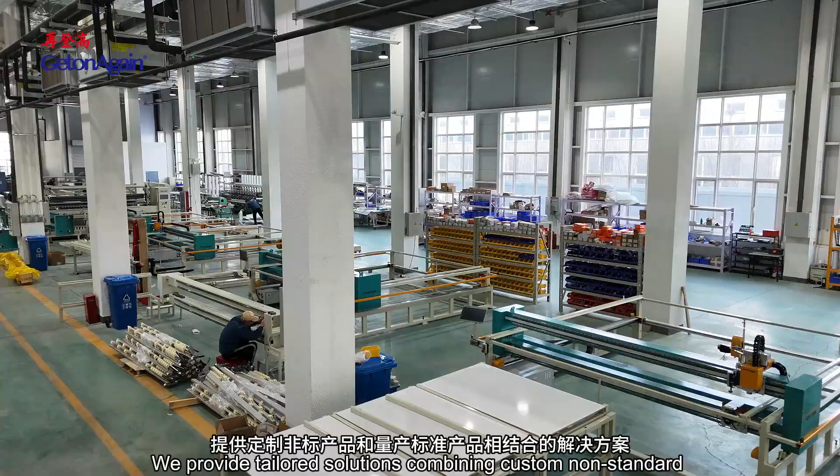We provide tailored solutions combining custom non-standard products with mass-produced standard products, including mechatronic machines, automated production lines, and intelligent factory solutions. Pattern room equipment includes the magic inkjet plotter, 2 cartridge with maximum printing speed at 110 square meters per hour.

4 cartridge with maximum printing speed at 200 square meters per hour. Vertical inkjet cutting plotter, 1 machine with multiple functions, pattern drawing with cutting, or standalone drawing. High-quality rotary cutting knife can cut minimum 80 grams per square meter paper for sample design, saving cost.

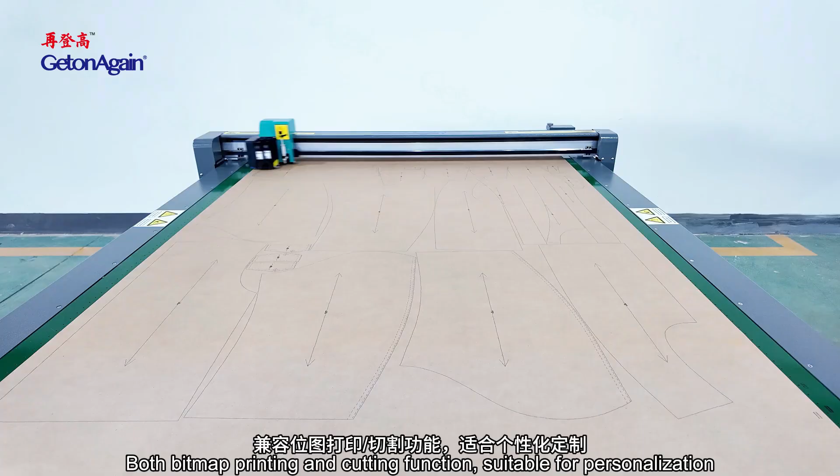Flatbed inkjet cutting plotter, both bitmap printing and cutting function, suitable for personalization, configured with long knife or short knife, and optional fixed knife sleeve or elastic knife sleeve, suitable for cutting various materials.

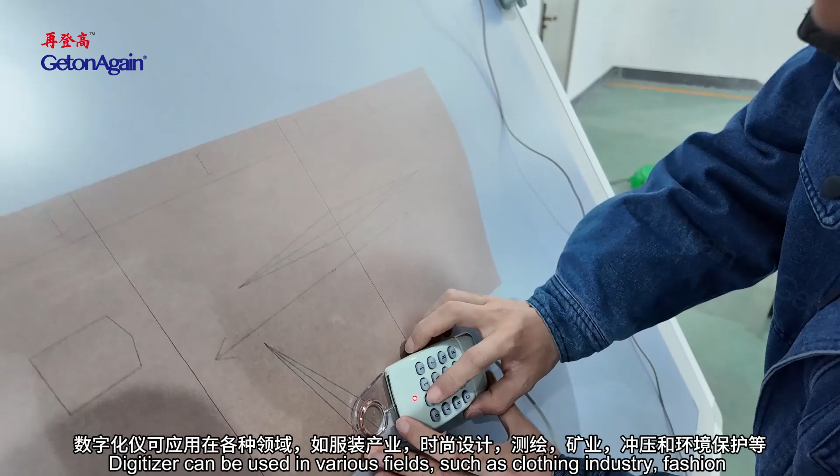Digitizer: easily reading paper patterns, convenient positioning, simple operation, accurately reading patterns, enabling faster design. It is a powerful tool for traditional manual drawing digitization. Digitizer can be used in various fields such as clothing industry, fashion design, surveying and mapping, mining, stamping, and environmental protection, etc.

Flatbed scanning digitizer: one button to start after placing scanning pieces. Can perform vacuum absorption, auto scanning, auto transmission. According to different models, supports ultra long width scanning.

Scanning speed up to 7,200 mm per minute. Scanning resolution 150 to 300 dpi. High definition panoramic 1:1 image to ensure effective identification of various contours, notches, and inner holes.

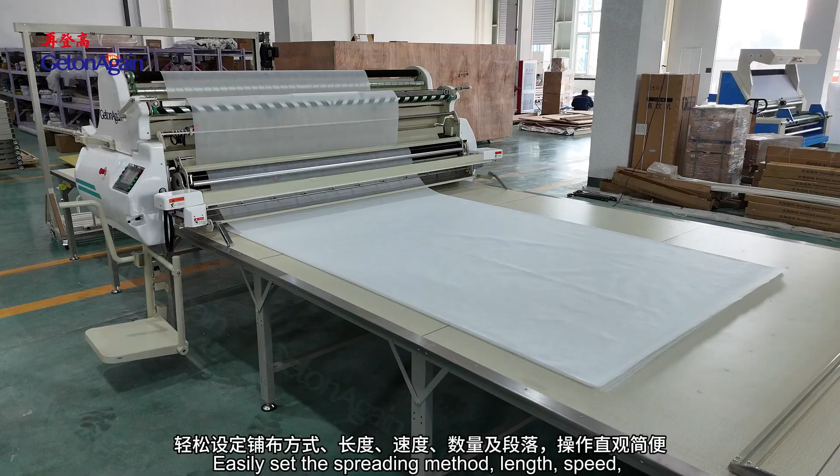Cutting equipment includes the automatic spreading machine. Easily set the spreading method, length, speed, quantity and sections, with intuitive and simple operation. Dual use for both knit and woven fabrics, suitable for t-shirts, children's clothing, loungewear, and toy textiles.

Automatic single layer cutting machine: no need to create specialized cutting molds. Cutting can be performed precisely by directly importing CAD design drawings into the equipment. It optimizes cutting paths, integrates repeated cutting lines, allows for pre-simulation of the cutting process, and supports continuous cutting for extra long materials.

Stripe and plaid matching cutting machine, equipped with several HD industrial cameras, performs intelligent combination according to the captured size, ensuring high accuracy fabric image capturing.

Stripe and plaid matching auto cutter, equipped with double knives and pen draw punching working mode, special for various stripes and plaids fabric cutting in single ply.

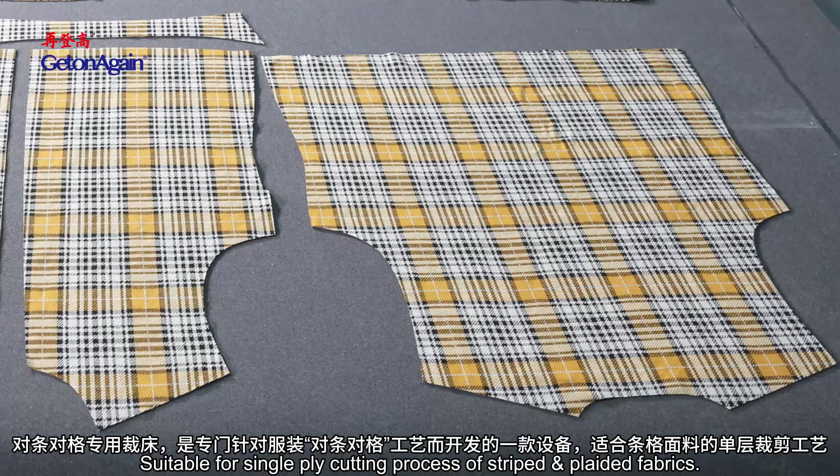High-end clothing customization: the effect of the alignment match stripe and plaid process has become an important measurement of the quality of this type of clothing. The stripe and plaid auto cutter is equipment specially developed for this process to meet matching stripe and plaid clothing needs, suitable for single ply cutting. Process of striped plaided fabrics.

Automatic multi-layer cutting machine: through the combination of micron-level intelligent sensing components and an intelligent control system, dynamic compensation and correction of cutter deformation during cutting operations are achieved, significantly reducing errors between the top and bottom layers of fabric during cutting, enabling truly high-precision intelligent cutting.

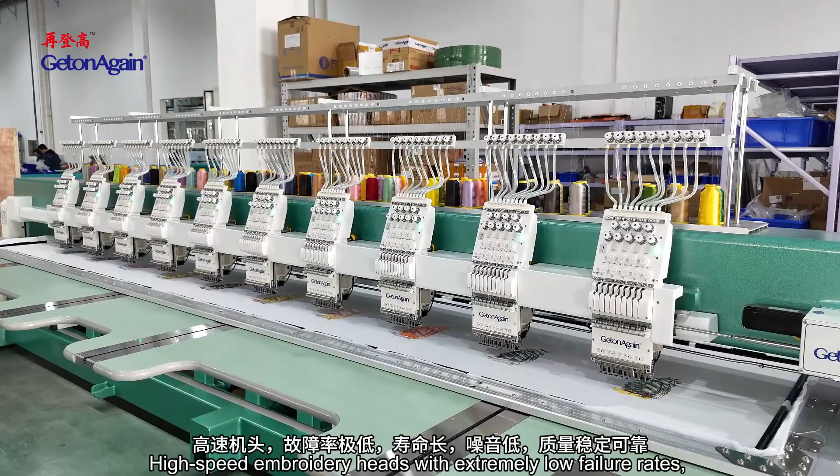Computerized embroidery machine: high-speed embroidery with extremely low failure rates, long service life, low noise, and stable, reliable quality. Equipped with an upper thread clamping device to prevent thread detachment and breakage, ensuring excellent embroidery results. Suitable for textile and garment manufacturing, footwear, hats, bags, home decoration, automotive interiors, and industrial products area.

Embroidery equipment includes the Cloud Smart Teaching Embroidery Machine, suitable for integrated theoretical and practical teaching of computer embroidery in fields such as fashion and apparel design, clothing design and its engineering.

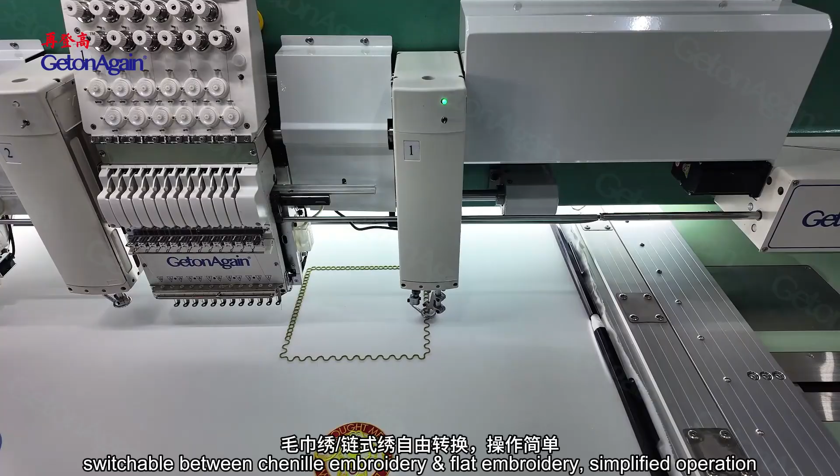Mixed chenille chain stitch embroidery machine. Mixed embroidery feature: according to color sequence settings, switchable between chenille embroidery and flat embroidery, simplifying operation. Chenille needle height can be adjusted to 10 levels according to chenille pile height or chain stitch thread thickness.

Multifunctional embroidery on garment, shoes, caps, home textile, toys, bags and luggage, arts and crafts, etc.

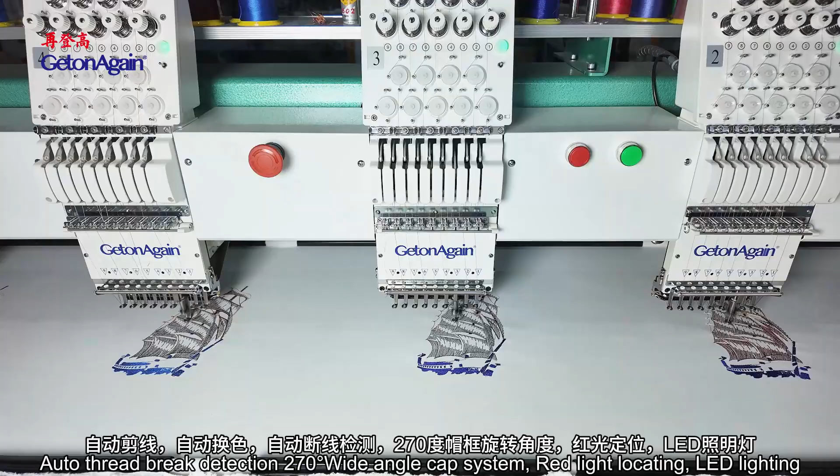Multi-head tubular embroidery machine multi-head series, suitable for embroidering on flat items, caps, garments, shoes, belts, bags, etc. Auto thread trimmers, auto color change, auto thread break detection, 270 degree wide angle cap system, red light locating, LED lighting, precise head and drive system to ensure exquisite embroidery work.

Drop tables, easy to lift up and down. Multiple heads greatly improve work efficiency, suitable for embroidery shops and factories of a certain scale.

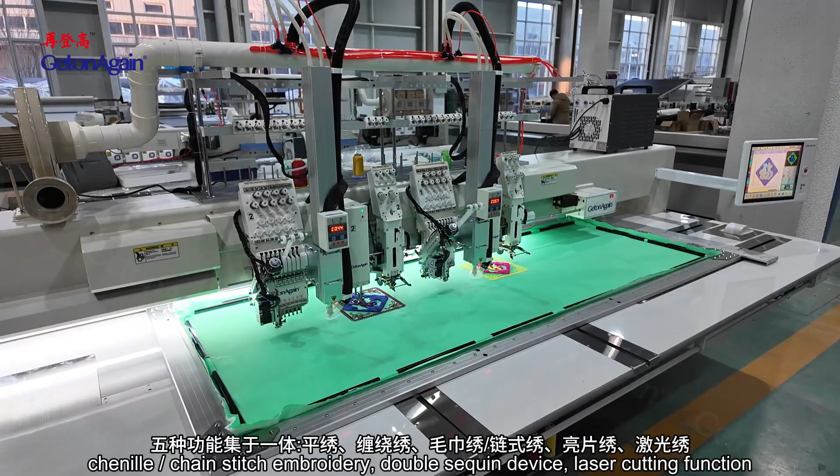Computerized 5-in-1 embroidery machine, integrating 5 functions in one machine: flat embroidery, coiling, tape cording embroidery, chenille and chain stitch embroidery, double sequin device, and laser cutting function. High precision, strong stereo sense, ideal artistic effect, suitable for embroidery of apparel, home textile, furniture, teaching, design and arts and crafts, etc.

Tufting series equipment includes computerized tufting machines with a rotary tufting head that works at any angle, avoiding positive-negative stitching differences, for higher efficiency and better tufting results. Suitable for various rugs, carpets, hanging carpets, tapestry, and other flooring, decorative, and home furnishing products.

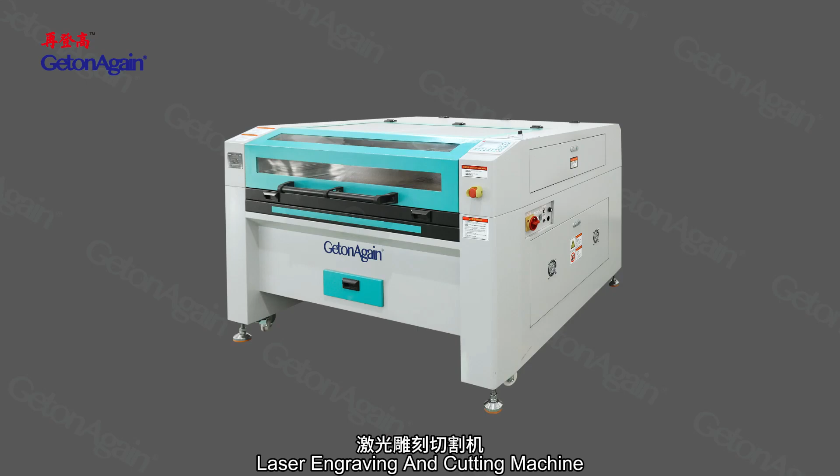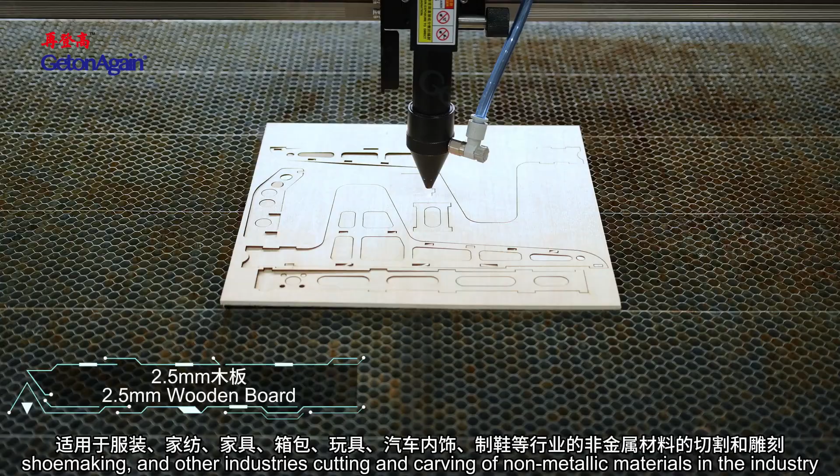Laser engraving and cutting machine. The cutting center can directly and seamlessly interface with software such as AutoCAD, CorelDRAW, AI, and Garment CAD, ensuring easy operation, high cutting precision, and fast cutting speed. Suitable for clothing, home textiles, furniture, luggage, toys, car interiors, shoemaking, and other industries for cutting and carving non-metallic materials.

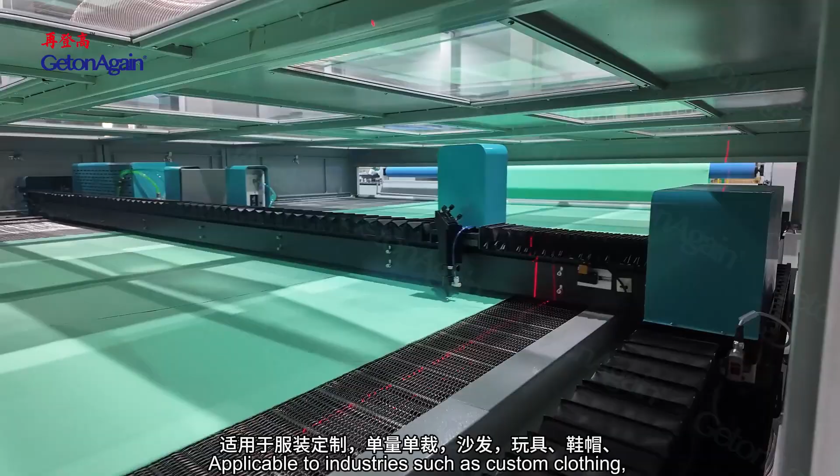Fully automatic large format laser cutting machine with inkjet device. Large format automatic feeding system designed to meet requirements for feeding and cutting whole rolls of fabric. Inkjet and cutting functions integrated for enhanced versatility. Applicable to industries such as custom clothing, single-piece cutting, sofas, toys, footwear and headwear, textile print pattern positioning cutting, automotive interiors, industrial filtration, and advertising, etc.

Sewing equipment includes an automatic arbitrary rotary single needle leather sewing machine, suitable for automated leather pattern sewing in automotive interiors, car seat covers, car door panels, airplane seats, and leather furniture upholstery. Brand new integrated sewing head design with a simple and elegant overall appearance, and a 15-inch HD industrial touch control screen.

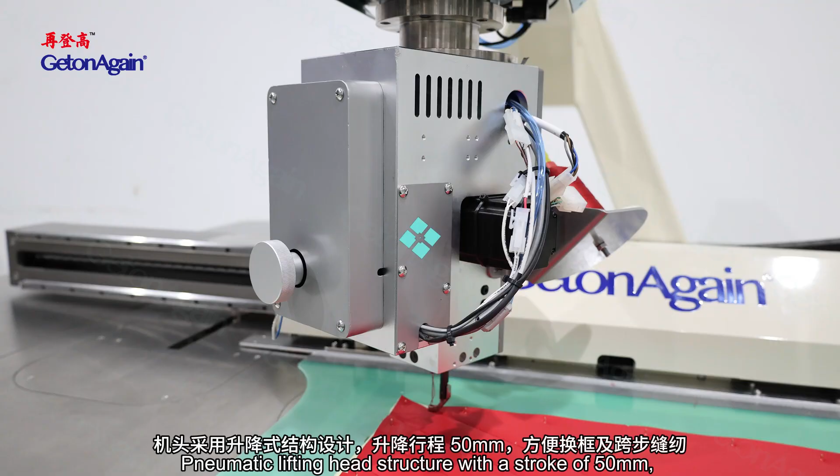Two-size workbenches designed with a flexible mechanism, reducing size after folding for easier transportation. Sewing head can rotate at any angle, avoiding differences between forward and reverse stitches, improving sewing efficiency and stitch quality. Pneumatic lifting head structure with a stroke of 50 mm, making frame changes and span sewing more convenient.

The advantage of an independently driven presser foot system lies in its ability to control presser foot height through real-time pattern programming, effectively addressing uneven presser foot pressure issues when sewing materials of varying thicknesses. Newly upgraded triple lead screw drive for higher dynamic positioning accuracy. Max speed of machine head at 2,500 stitches per minute.

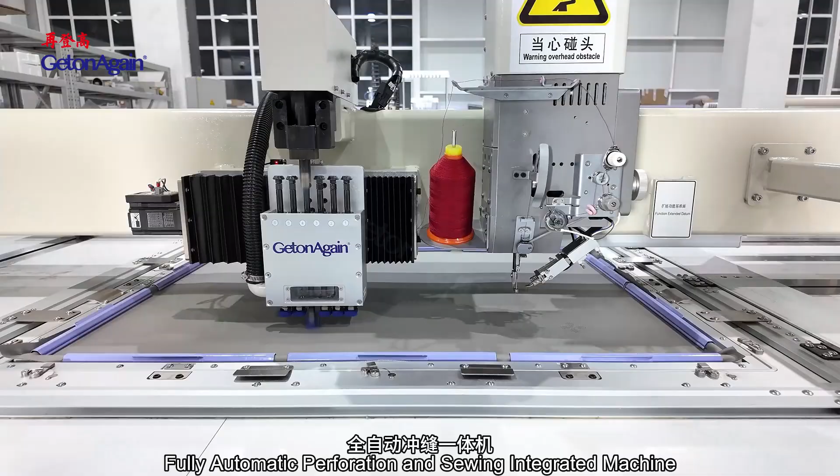Fully automatic perforation and sewing integrated machine. The punching machine head is specifically designed and developed for leather materials, equipped with various round punching tool specifications. Sewing head has an up moving stroke of 50 mm, providing sufficient space for material loading and easy operation. Suitable for perforation and sewing processes of various types and thicknesses of genuine leather and microfiber leather used in car seats, automotive interiors, aircraft seats, luggage, furniture, and more.

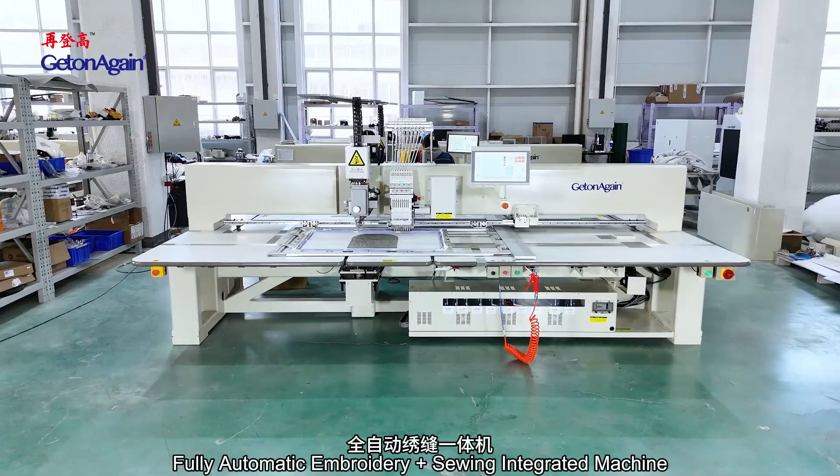Fully automatic embroidery and sewing integrated machine. 9-color embroidery machine head to meet the embroidery needs of different industries. The embroidery thread clamping mechanism incorporates a novel upper thread clamping assembly, effectively reducing thread breakage and slippage during operation. Specially designed sewing machine head for leather materials, producing beautiful stitching.

Presser foot height is motor controlled and highly adjustable. Sewing machine head has an up-down moving stroke of 50 mm, providing ample space for material loading and ease of operation. Suitable for various types and thicknesses of genuine leather and microfiber leather for automotive seats, car interiors, aviation seats, luggage, furniture, etc., combining embroidery and sewing processes.

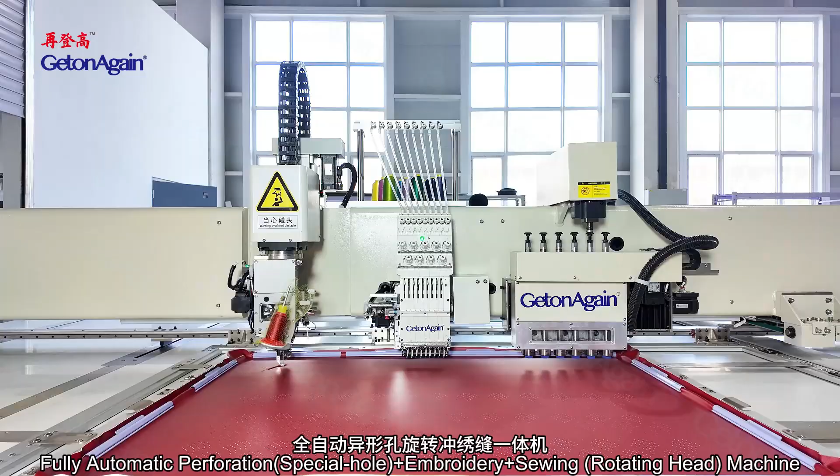Fully automatic perforation special hole and embroidery and sewing rotating head machine. Integrates punching, embroidery, and sewing into one machine, allowing for arbitrary pattern design and seamless combination of punching, embroidery, and sewing for complex processes. Specially developed punching machine head for leather materials. The 9-color embroidery head meets the embroidery needs of various industries.

Sewing machine head features an arbitrary rotation structure, creating beautiful stitching, reducing frame movement frequency, and improving efficiency. Suitable for punching, embroidering, and sewing processes for various types and thicknesses of genuine leather and microfiber leather used in automotive seats, car interiors, aviation seats, luggage, and furniture, etc.

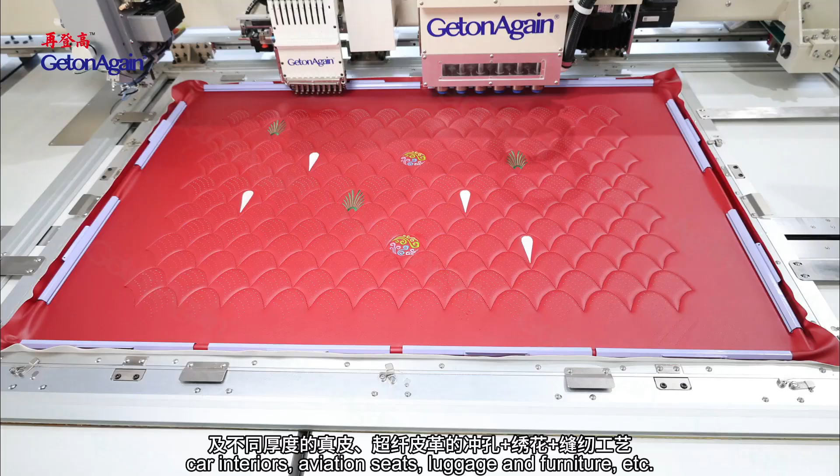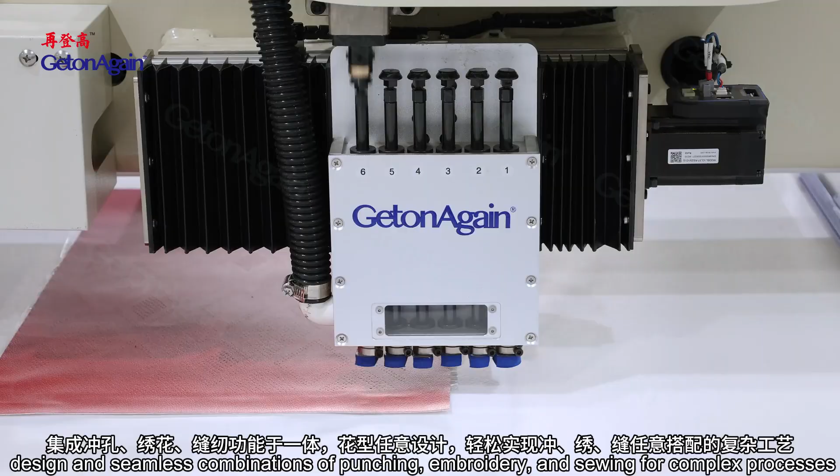Fully automatic perforation round hole and embroidery and sewing rotating head machine. Integrates punching, embroidery, and sewing into one machine, allowing for arbitrary pattern design and seamless combination of punching, embroidery, and sewing for complex processes. The 9-color embroidery head meets the embroidery needs of various industries.

Sewing machine head features an arbitrary rotation structure, creating beautiful stitching, reducing frame movement frequency, and improving efficiency. Suitable for punching, embroidering, and sewing processes for various types and thicknesses of genuine leather and microfiber leather used in automotive seats, car interiors, aviation seats, luggage, and furniture, etc.

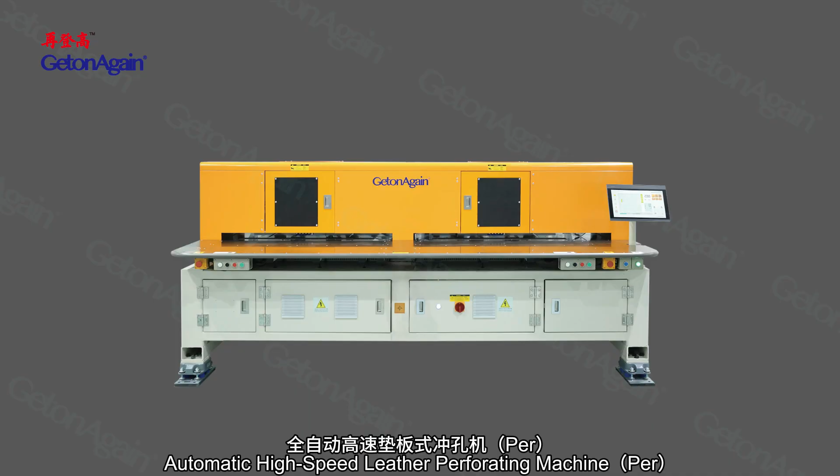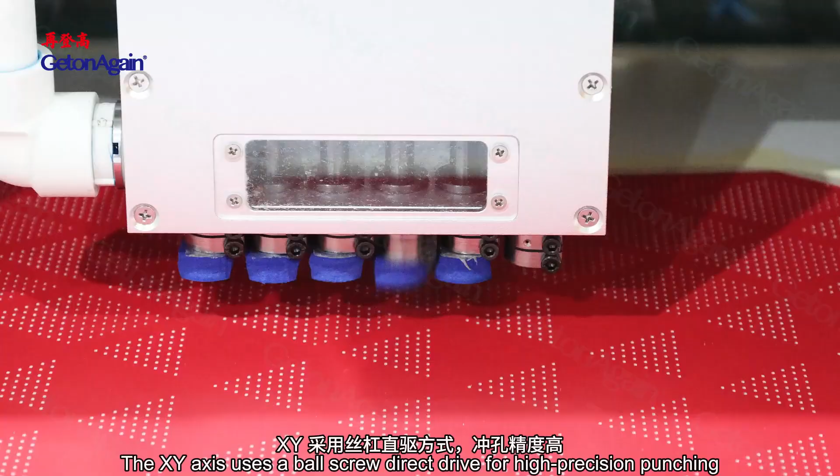Automatic high-speed leather perforating machine for punching processing of leather or microfiber leather with various types and different thickness, such as car seats, aviation seats, shoes, bags and furniture. Full-scale 3-dimensional protective design ensures safer operation. The punch toolbox is heightened to prolong the punch tool's spring service life and reduce part wear. The XY axis uses a ball screw direct drive for high-precision punching. The surface of key punching parts is strengthened to resist impact and fatigue, meeting the needs of high-intensity work. Single-head machines can make up to 2000 holes per minute, and double-head ones up to 4000.

Automatic template sewing machine, rotary head, heavy material. Both the X and Y axis use a screw and slide transmission method, providing high precision and good stability. Suitable for pattern sewing on leather and heavy materials, such as car seats, sofas, massage chairs, boat interiors, and aircraft seats. The machine head can rotate freely to ensure the quality of the sewing stitches.

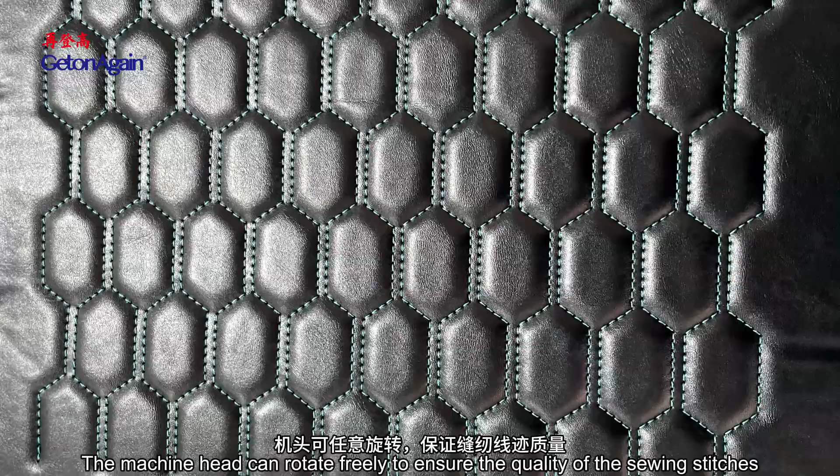Automatic template sewing machine. Double belt, double guide rail, double stepper motor structure. The machine head adopts oil-free lubrication, and the rotary shuttle adopts oil-line lubrication technology to completely eliminate fabric pollution. Identify patterns through RFID barcodes and automatically switch to the corresponding sewing program for quick sewing. Used for template sewing processes such as opening pockets, notches, bag covers, collar trimming, etc.

Pattern sewing machine. This machine can easily sew thick thread with a thickness of 1.2mm, has a 2 times large rotary hook with automatic thread trimming, and the maximum sewing speed can reach 2500 RPM.

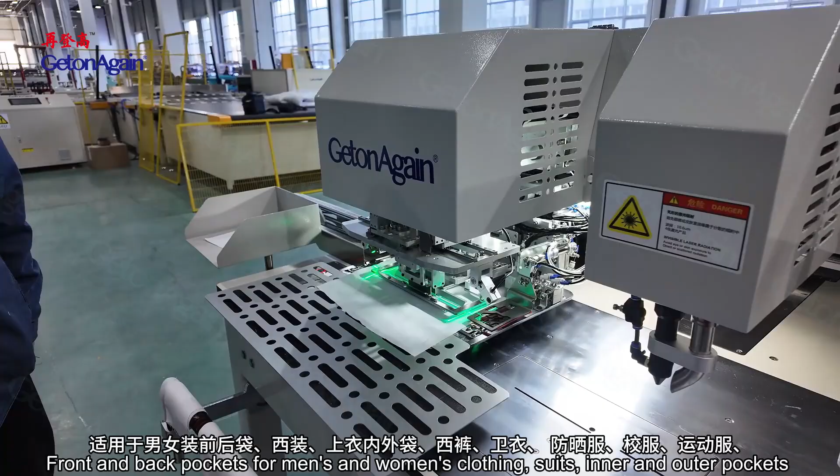Automatic laser pocket opening machine. Automatic ironing-free pocket folding, automatic material feeding, laser pocket opening, automatic sewing, automatic thread trimming, and automatic material collection. Used for front and back pockets for men's and women's clothing, suits, inner and outer pockets of jackets, dress pants, hoodies, sun protection clothing, school uniforms, sportswear, cotton padded jackets, down jackets, workwear, jackets, uniforms, trench coats, cashmere coats, and plackets for polo shirts.

Quilt edge binding machine. Features single needle compound feed, achieving cutting, binding, and sewing in one seamless operation. Enlarged right side waste discharge port with pneumatic waste discharge assistance ensures smoother disposal of waste generated during edge cutting. Special synchronized feeding structure, including alternating presser foot, needle, feed dog, and binding attachment. Ensures no wrinkles or misalignment during straight line or corner sewing for a flawless binding effect.

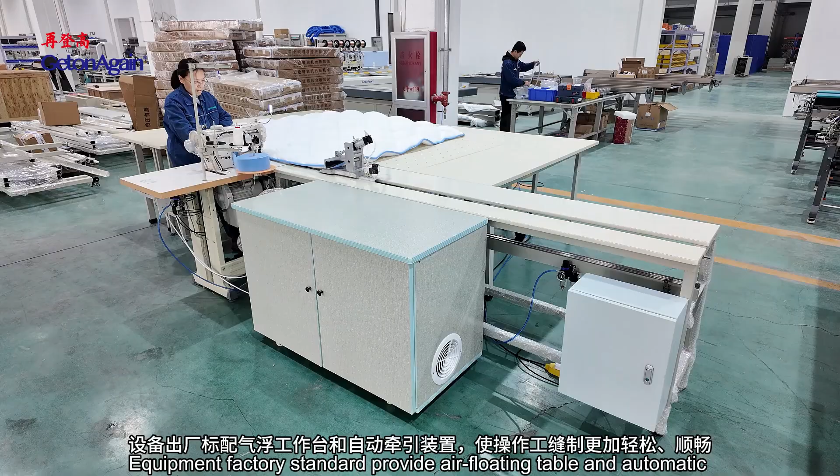Designed for edge binding processes of quilts such as cotton quilts, summer quilts, spring and autumn quilts, and other bedding items. Quilts, mattress binding with pulling sewing workstation. Equipment factory standard provides air floating table and automatic pulling device, making sewing worker operation easier and smoother. Equipped with PLC control pulling device synchronized with sewing machine electronic control, these two machines work at the same speed and synchronized direction.

Optional automatic storage and vacuuming device improves efficiency, reduces dust emissions, and provides the sewing operator a clean and tidy working environment. Binding result is rich with a strong, solid feel. Corners are smooth and nice, evenly stitched length, no hairy edge, no edge folding, neither corner raising effect, nor other negative symptoms.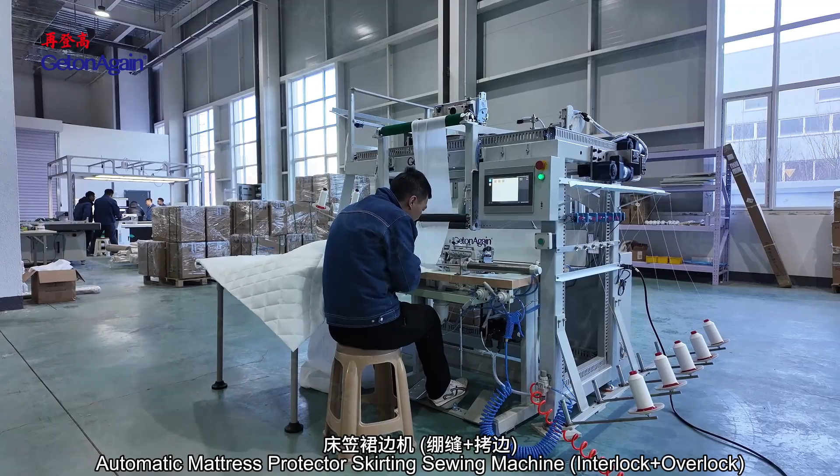Automatic mattress protector skirting sewing machine, interlock and overlock. Suitable for processing fitted sheets, all-in-one to finish binding stitching of elastic rope cord and bag skirt, and the overlocking of bag skirt to mattress protector topper layer.

Multi-hole bar tacking machine, press arm and sewing frame work synchronously, ensuring high precision bar tacking. Suitable for chair pad, cushion and pillow, all those with fillings, and bar tacking requirement for reinforcing sewing work.

Long arm label sewing machine adopts connecting rod thread pickup, large rotary hook, needle bar swinging up and down, feeding simultaneously, forming zigzag lock stitch. Reasonable swing mechanism makes switching between zigzag sewing and normal lock stitch easy and free. Upper and lower synchronous feeding structure makes it easy to operate, with good sewing effect and beautiful stitches.

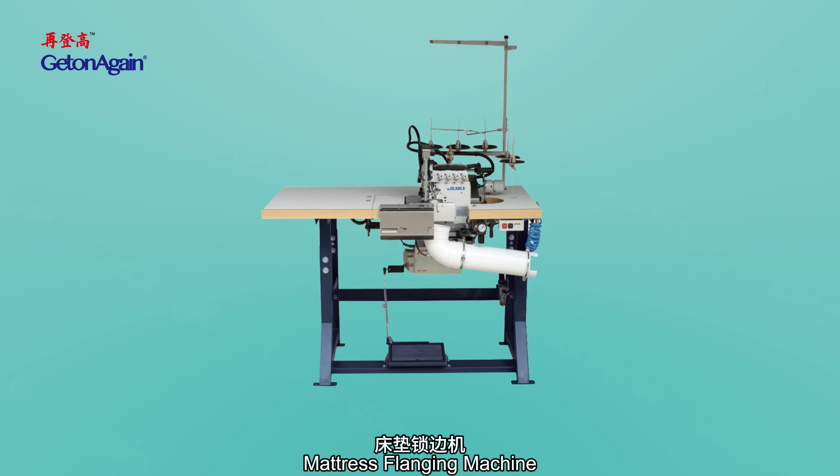Mattress flanging machine, equipped with a Juki machine head from Japan and a double bar twin needle design. Easily switches between thick and thin fabrics sewing. Flanging thickness 10mm to 70mm. Max speed 3000 revolutions per minute. Flanging width 25mm.

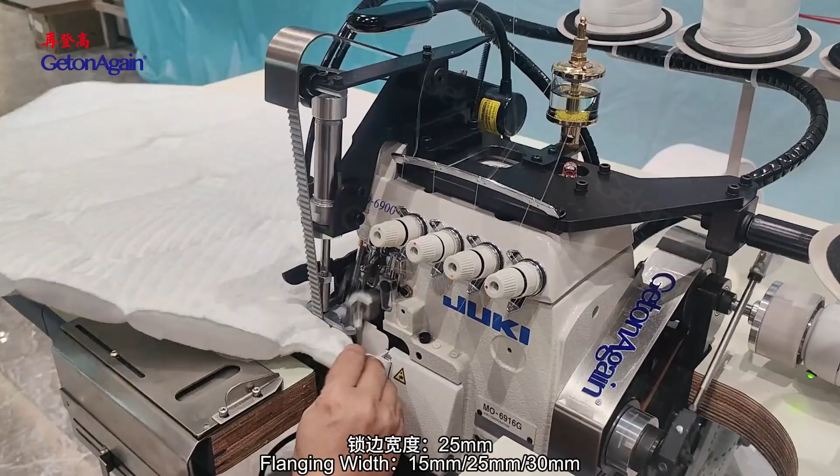High-speed mattress flanging machine. Effortless switching between thick and thin fabrics sewing. Synchronized feeding presser foot structure provides excellent feeding capability, enabling ultra-thick fabrics that standard machine heads cannot sew to pass through smoothly. Flanging thickness 10 to 90mm. Automatic lubrication and cooling system for the synchronized feeding structure. Max speed 4000 revolutions per minute. Flanging width 15mm, 25mm, 30mm.

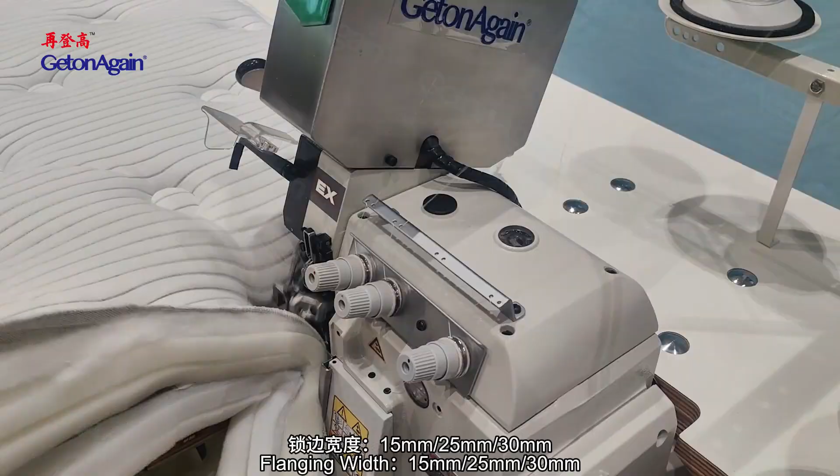Heavy-duty mattress flanging machine. Innovative drive mechanism ensures more convenient and powerful sewing performance. Adjustable stitch length of 4.5 to 6 stitches per inch. Easily switches between thick and thin fabric sewing, capable of overlocking extra thick mattress fabrics ranging from 10mm to 90mm. Maximum sewing speed reaches up to 4500 stitches per minute. Overlocking width is 25mm.

Computerized synchronized hot cutting binding machine, designed for products requiring binding processes, equipped with a standard pneumatic hot cutter. The binding tape no longer requires manual cutting; simply press a button to complete precise cutting. The hot cutting edges are clean, with no fraying or loose threads, significantly improving production efficiency.

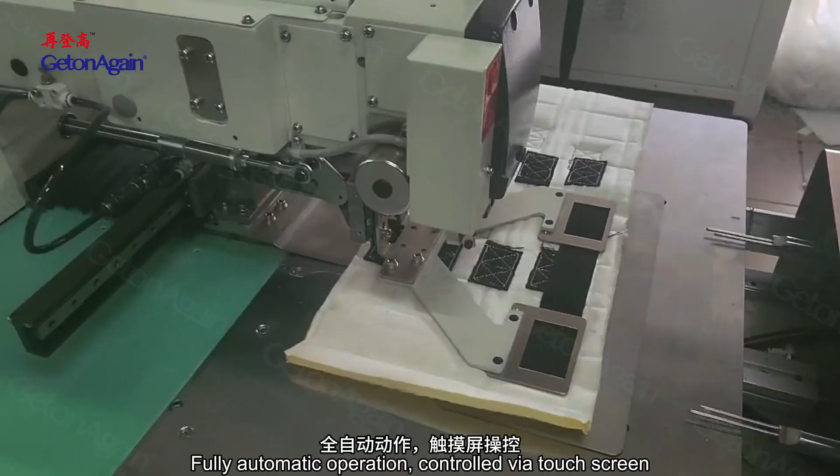Mattress handle stitching machine, fully automatic operation, controlled via touch screen. Customized stitching patterns are possible, significantly improving production efficiency. Easy to operate, precise positioning.

Semi-automatic mattress tape edge machine, primarily designed for sewing spring mattresses. This machine efficiently completes edge overlocking between mattress fabric and sidewall fabric. It is also suitable for sewing other types of mattresses and sofa cushions. Key features include an electrically adjustable work table with high strength, independent support, ensuring exceptional stability during operation.

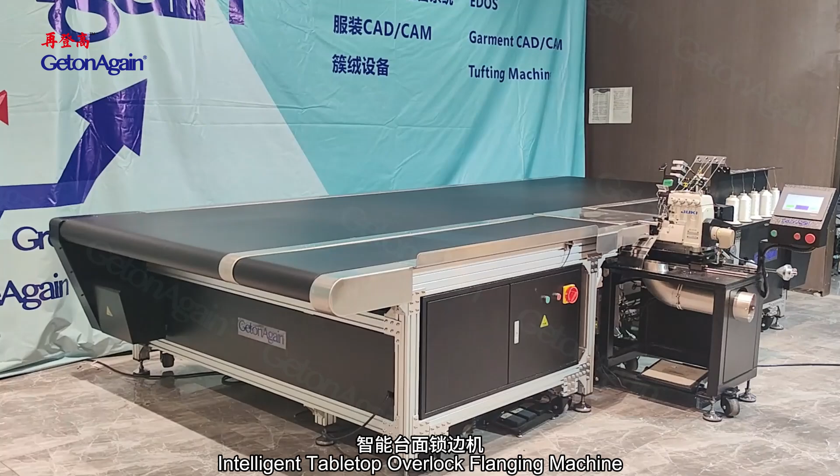Intelligent tabletop overlock flanging machine, equipped with a modified Juki thick material overlock machine head. Newly designed ultra-high lifting presser foot with a lifting height of 35mm. Machine head can move, making threading and daily cleaning more convenient. Flanging thickness 10mm to 80mm, easily switches between thick and thin fabric sewing.

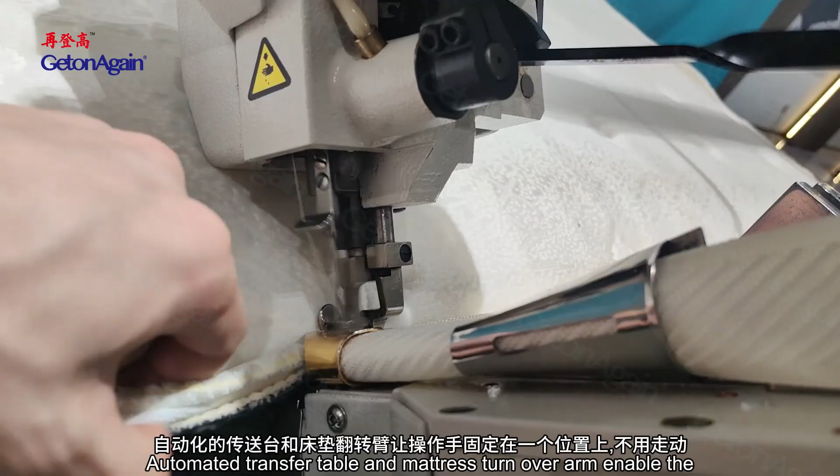Auto flip edge machine. Automated transfer table and mattress turnover arm enable the operator to work in one position without moving around. Variable speed drive automatically slows down on turning corners. The machine head can rotate freely to ensure the quality of the sewing stitches. When ready to sew the opposite side, the turnover arm unit flips the mattress automatically.

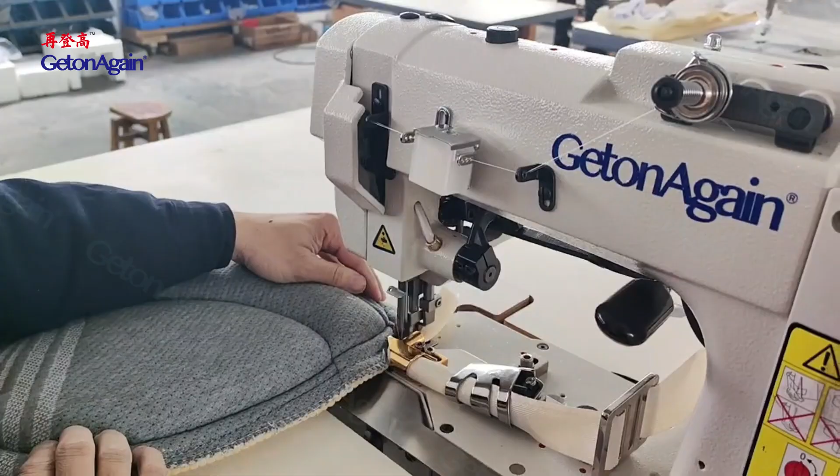Machine head height and inclination are adjustable. Industrial sewing machines include various overlock and lock stitch machines. Flat edge machine, mainly used for stitching between mattress fabric and side border, suitable for sewing other soft mattresses, bedding, sleeping bags, and tents. Stable performance, little vibration, low noise, and high efficiency.

Long arm embroidering machine. This machine is mainly used for the applique work of mattress crib fabric. The upper and lower shafts of the machine are of integral structure, and a Taiwan servo motor is used to automatically position the needle. The new presser foot is equipped with a needle bar lifting device to make thick fabric quilting more convenient and beautiful.

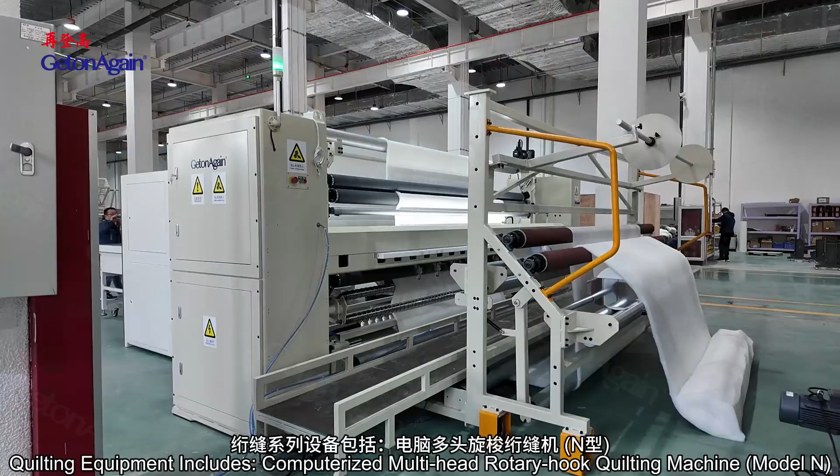Quilting equipment includes the computerized multi-head rotary hook quilting machine model N and double row lock stitch multi-head quilter with large rotary hook. Max speed of 1500 RPM, more than 2 to 3 times that of normal shuttle quilting machines, greatly improving work efficiency. 3-fold capacity rotary hook means less bobbin changing frequency, beautiful stitches, no lost stitch, no thread loops.

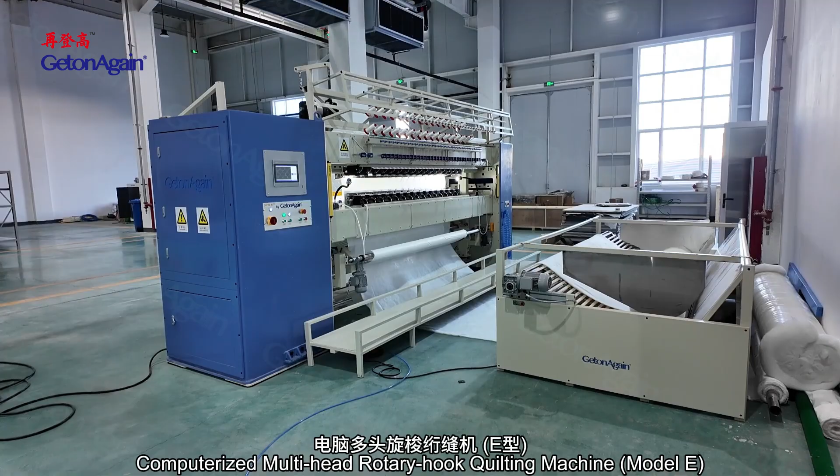Computerized multi-head rotary hook quilting machine model E, with 5-time jumbo rotary hook for less bobbin changing frequency, beautiful stitches, no lost stitch, no thread loops. The interval between the upper and lower needle bars can be adjusted to any value from 3 to 9 inches. The lower needle bar can move half a needle pitch in the X direction, so that quilting needle bars of different sizes and patterns can be combined, especially for some non-standard size patterns, achieving a unique effect.

Computerized multi-needle shuttle quilting machine, flying shuttle for quilting of fitted sheets, bed covers, summer quilts, and clothing products with quilting patterns.

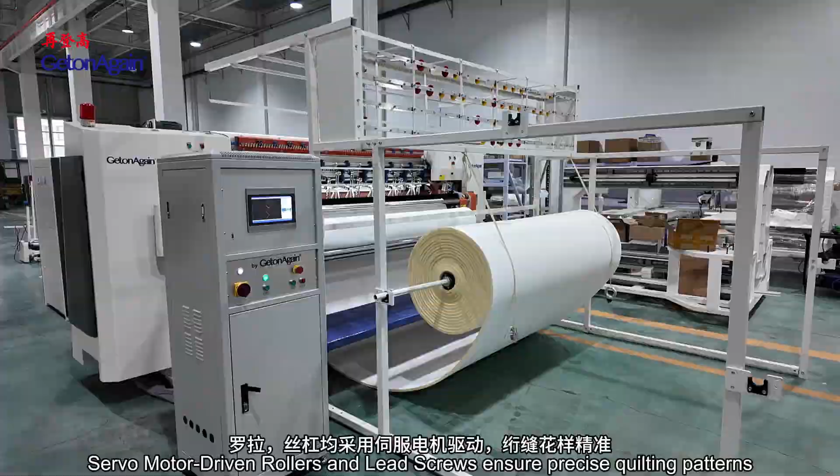Computerized multi-needle chain stitch quilting machine, servo motor driven rollers and lead screws ensure precise quilting patterns, suitable for mattresses, mattress covers, sofas, bedding, home textiles and home decor.

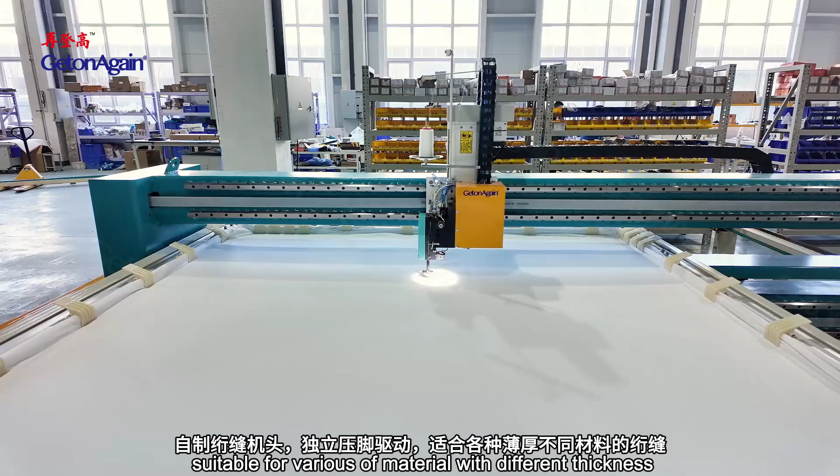Computerized single needle quilting machine with lifting head. The extendable quilting frame can be freely adjusted according to required size. GetonAgain quilting head with independent presser foot drive, suitable for various materials with different thickness. Full servo motor control provides powerful and accurate driving force. Automatic lifting head makes it easy to change the frame after finishing quilting. New quick frame changer optional. Used for quilting process of home textile products such as quilts, comforters, mattress protectors, blankets, sleeping bags, single needle art quilts, etc.

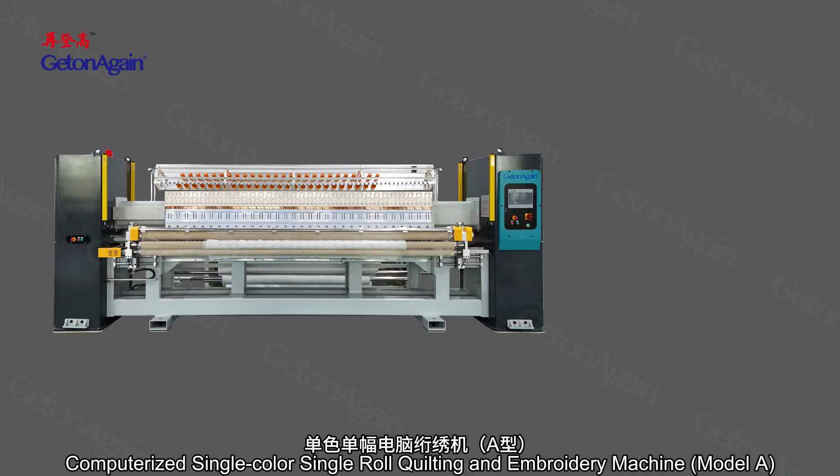Computerized single color single roll quilting and embroidery machine model A, for summer quilts, bedspreads, mattress protectors, pillowcases, blankets, garments, car seat covers, car floor mats and furniture upholstery, etc.

Equipped with a new high-speed double needle quilting and embroidery machine head with surface coating treatment for parts. Maximum speed 1000 RPM, recommended operating speed 750 to 850 RPM.

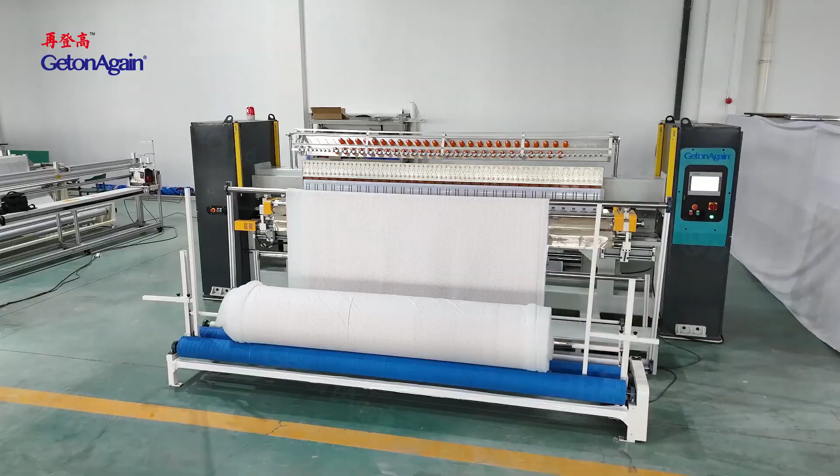Ultrasonic equipment includes the ultrasonic slitting machine, which adopts ultrasonic cutting technology to ensure smooth cutting edges, precision edge cutting, and no deformation, without fraying, fiber pull, or edge curling after cutting. Cutting rollers and patterns can be customized to meet various needs.

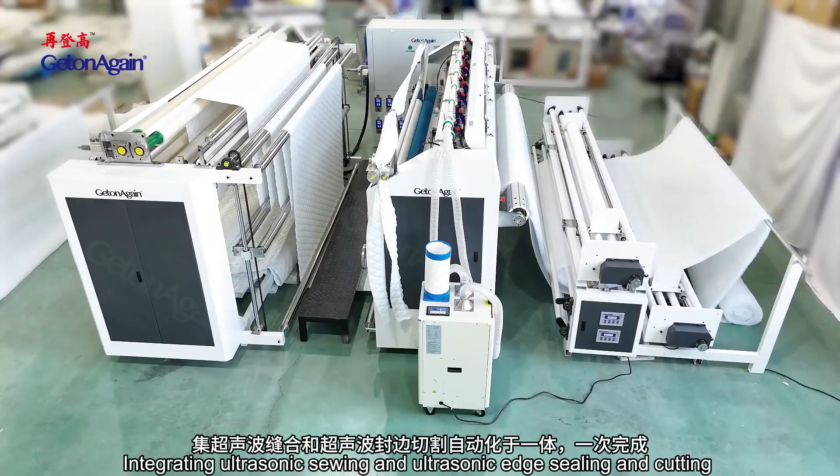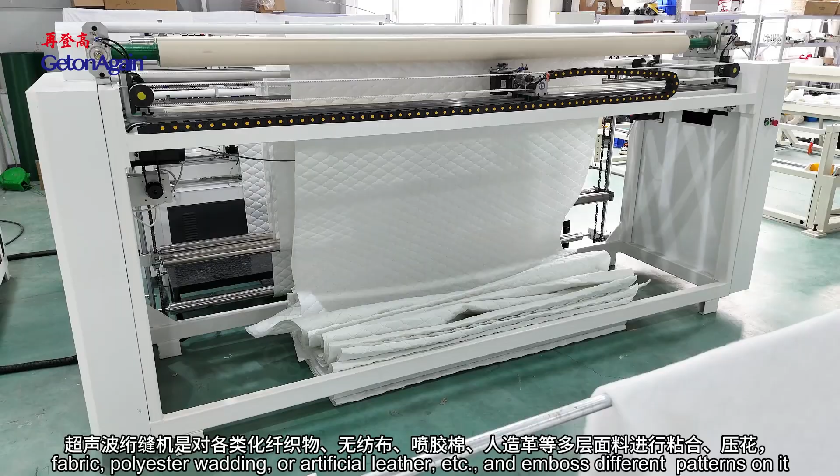The automatic ultrasonic quilting machine integrates ultrasonic sewing and ultrasonic edge sealing and cutting automation into one, completing the process in a single step. The latest structure design with interleaved transducers ensures seamless, non-wrinkled embossing. After quilting, it can be connected to a cutting machine to produce the finished product, or to a rewinding device for fabric rolls. The ultrasonic quilting machine bonds multiple layers of polyester fabric, non-woven fabric, polyester wadding, or artificial leather, and embosses different patterns on them. Patterns are clear and beautiful, the fabric doesn't deform, and bonding is strong with high efficiency.

The ultrasonic lace machine has ultra-high power output with adjustable power to meet welding and cutting requirements for different materials and thicknesses. Mold size ranges from 23 to 60 millimeters. The mold lifting system offers options for manual or pneumatic operation. Stripping allows simultaneous single or multi-strip cutting with edge melting treatment for clean, burr-free edges. Pattern molds and welding heads undergo special hardness treatment for higher wear resistance. Various patterns can be customized as needed.

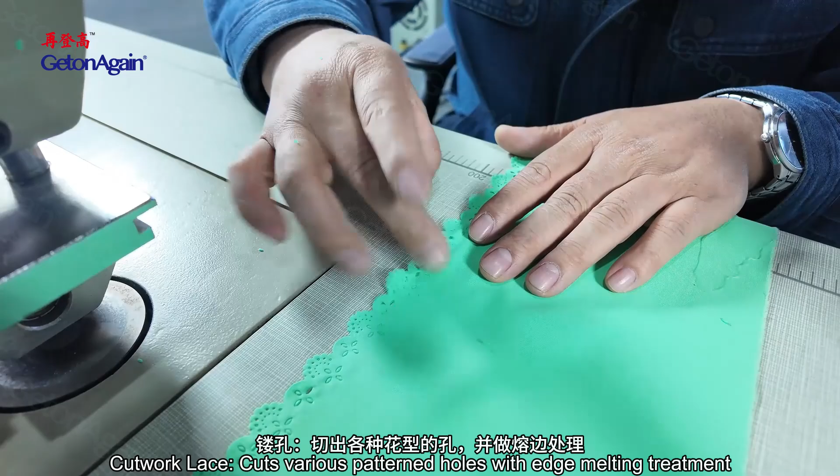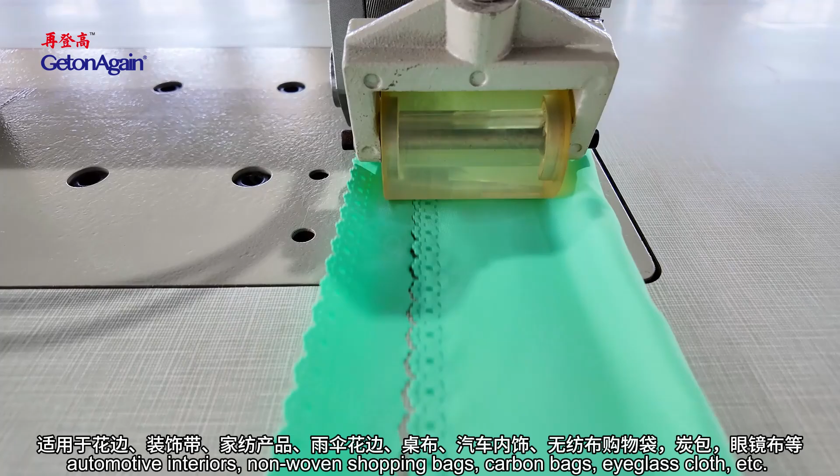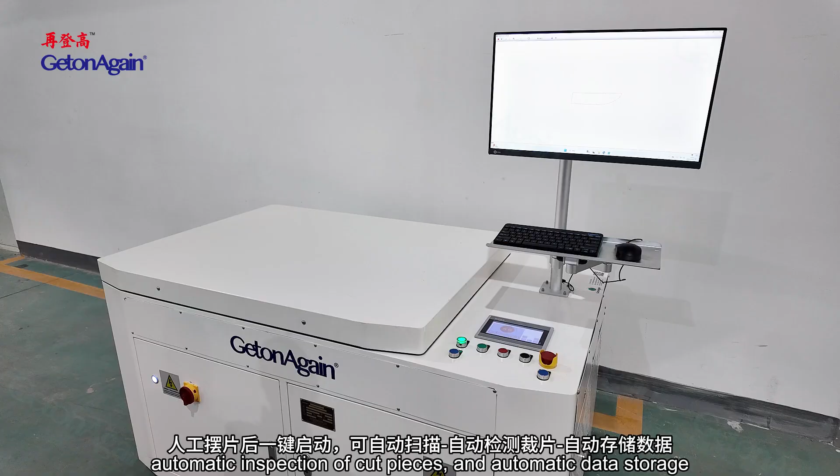Visual recognition and inspection equipment includes cut piece visual inspection instruments. After manual placement, one-click start allows for automatic scanning, automatic inspection of cut pieces, and automatic data storage. Scanning speed can reach up to 120 mm per second, with no need for additional lighting, ensuring reliable use in all weather conditions. Scanning resolution is 150 to 300 dpi, and the high-definition panoramic 1:1 image ensures that the inner and outer contours of the cut pieces are clearly visible.

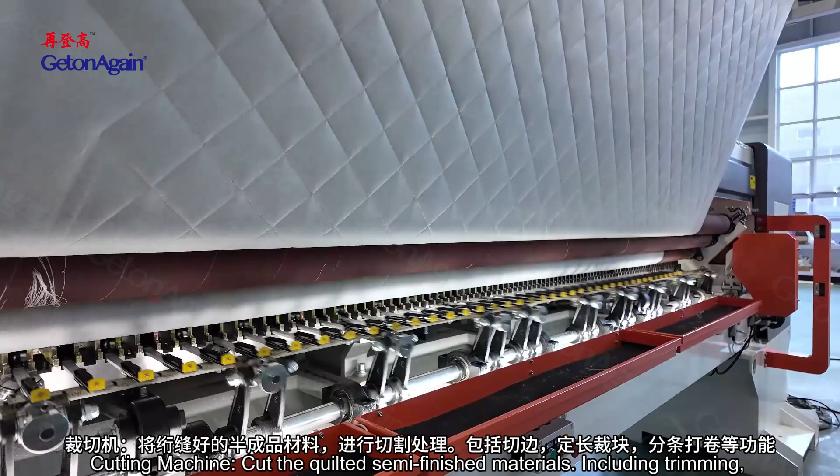The automated production line series includes the multi-needle quilting machine, flying shuttle and cutting machine, and the 4-side tape binding machine production line. The multi-needle quilting machine quilts and fixes raw materials with lock stitches, mainly used to process quilt cores and cushions. The cutting machine cuts the quilted semi-finished materials, including trimming, fixed length cutting, slitting and rolling, and other functions.

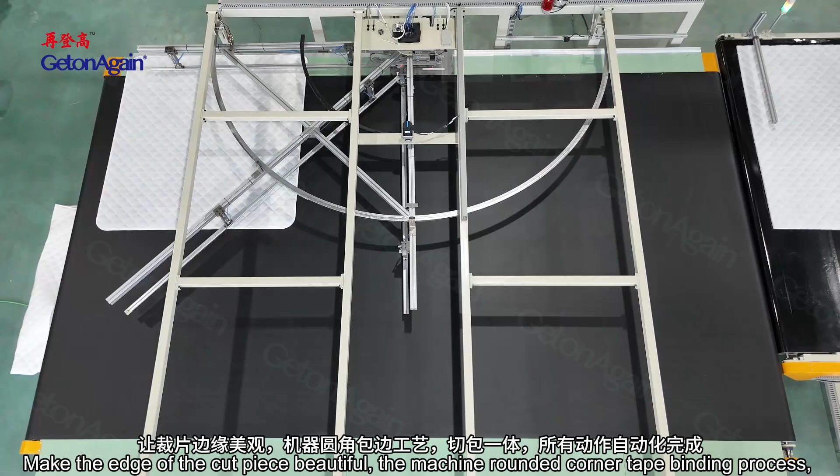The alignment platform is a material transfer alignment mechanism. The cutting block waits to enter the next sequence on this platform, and at the same time is aligned with the subsequent reference processing position by translation. The automatic tape binding machine processes the cutting piece to make its edge beautiful, using a machine rounded corner tape binding process. The cutting and tape binding are integrated, with all actions completed automatically.

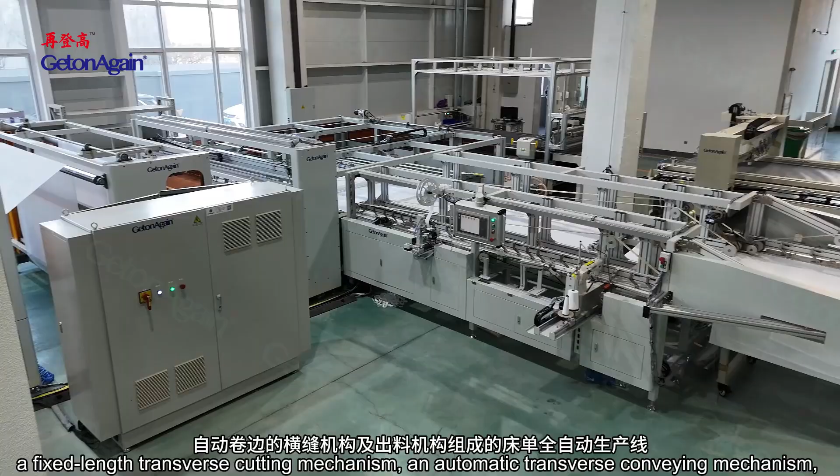The automatic bed sheet production line is a fully automated system composed of a feeding mechanism, an adjustable width longitudinal sewing mechanism, a fixed length transverse cutting mechanism, an automatic transverse conveying mechanism, an automatic hemming transverse seam mechanism, and a discharging mechanism.

The automatic blanket straight corner binding machine is capable of holding 2 rolls of non-elastic fabric, equipped with edge alignment function, and automatically pulls and cuts into panels. Pulling lengths can be set freely. It performs 4-side tape binding sewing for inelastic blankets.

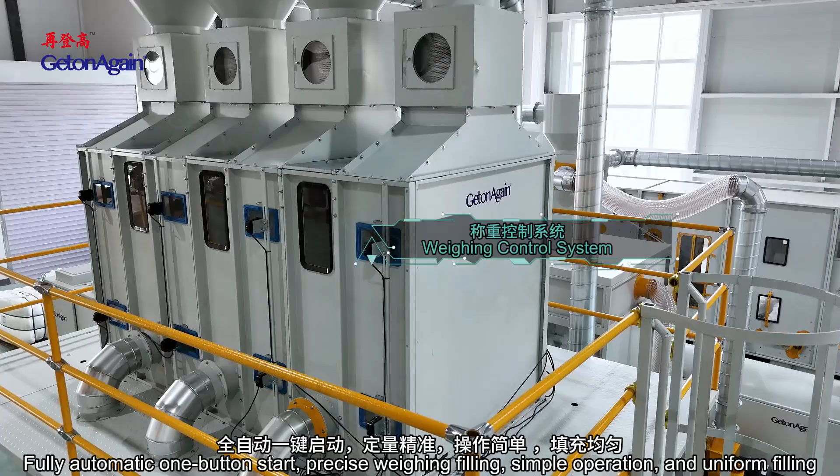The automatic vacuum pillow filling production line is suitable for loosening, weighing, and filling polyester short fiber raw materials greater than 0.7D into products such as pillows, cushions, back cushions, and sofa pads. Fully automatic one-button start provides precise weighing and filling, simple operation, and uniform filling. PLC program control enables automatic cotton feeding, negative pressure cotton filling, and automatic clamping tools for bagging.

The computerized multi-head rotary hook quilting machine and 4-side edge sewing machine is capable of quilting patterns in various sizes without changing needle positions, greatly enhancing operational efficiency. The double row machine with a lower needle row can move half of the head distance in the X direction, creating combination patterns of different sizes when coordinated with the upper needles.

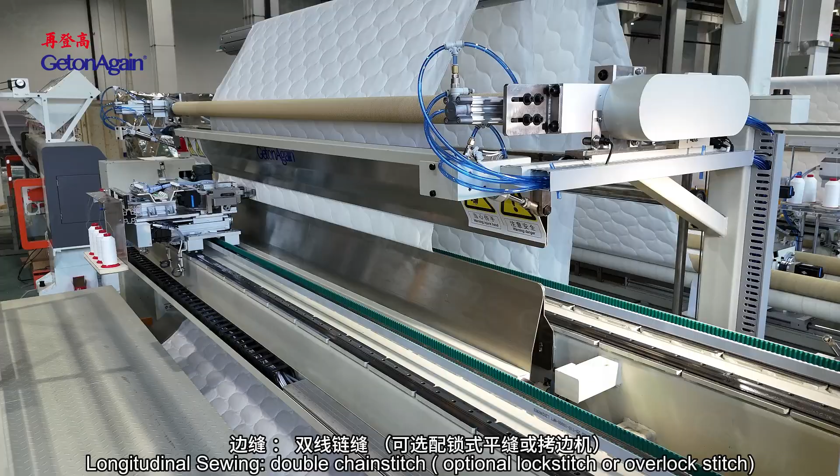Longitudinal sewing uses double chain stitch, with optional lock stitch or overlock stitch. Transversal sewing uses multi-needle chain stitch sewing, with transversal cutting between the 4 stitches, cutting as per set length and feeding to the next sequence.

The roll fiber panel cutting case filling line performs edge trimming, length counting, and cutting for polyfiber, thermal bonded wadding, and chemical bonded wadding. Machine features an unpowered material loader that can pass bonded wadding to the panel cutter machine, equipped with bearings at the zones of each roller, saving labor and energy.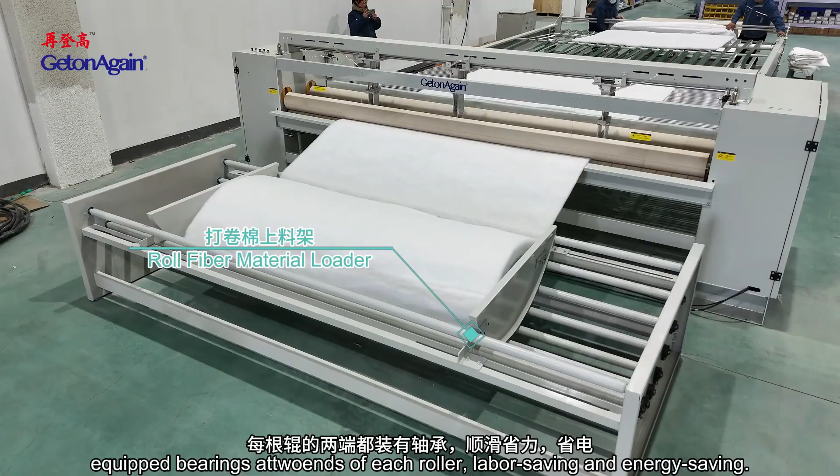Fast towel horizontal sewing machine for folding and sewing inelastic towels. Free sewing auxiliary equipment includes automatic edge alignment, relaxing machine, and air blowing. Roll fabric is mounted and folded as a flat fold state to achieve tension-free fabric placing.

Wave-type air blowing device: during the loosening fabric process, the fabric is relaxed by the blowing device.

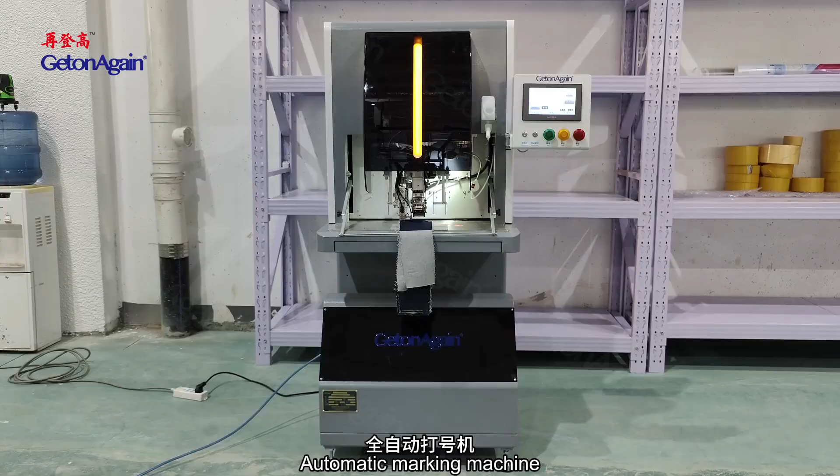Automatic marking machine with 1-click start and intelligent grabbing. One person can operate 4 to 5 machines at the same time, reducing labor cost. It features automatic number adjustment, automatic counting, wrinkleless operation after flipping, continuous numbering, and accurate, clear positioning. Used for cutting pieces for jeans, shirts, workwear, down jackets, and more.

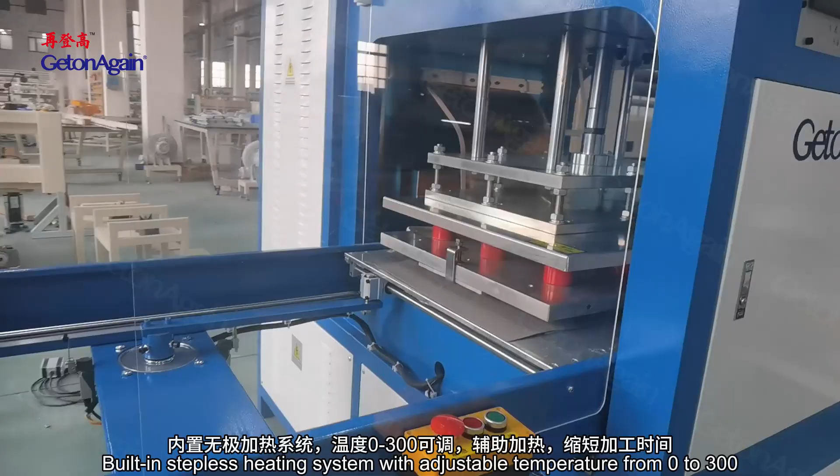High-frequency machine with a built-in stepless heating system, adjustable temperature from 0 to 300 degrees, providing auxiliary heating to shorten processing time. The spark suppressor instantly cuts off current during sparking to prevent damage to molds and materials. An automatic overcurrent protection device protects electronic tubes and molds, extending their service life.

Used for embossing and stamping of car and motorcycle foot mats, blister packaging, plastic heat sealing, and leather embossing.

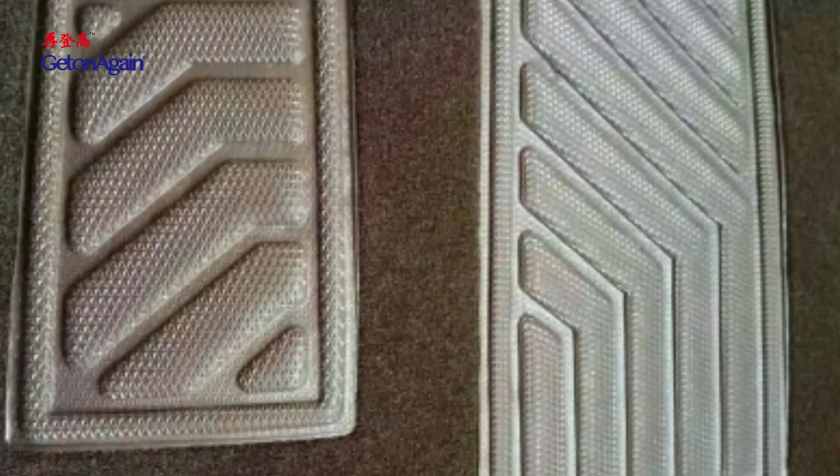Fully automatic winding machines. Post-finishing equipment includes automatic folding and packaging machine equipment, mainly composed of a folding device, rolling device, stacking, compressing, and conveyor device.

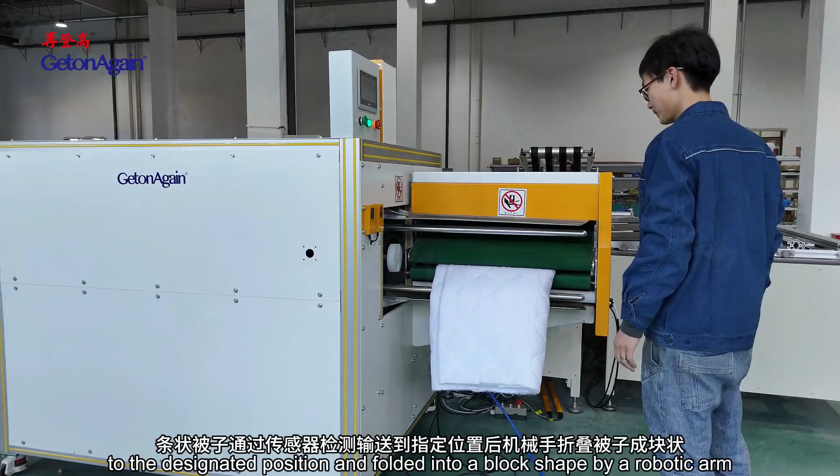Folding device: after the quilt is detected and transported to the designated position by sensors, a robotic arm folds the quilt into a strip shape. The strip-shaped quilt is then transported to the designated position and folded into a block shape by a robotic arm.

Rolling device: the strip-shaped quilt is transported to the automatic rolling device to complete the rolling process. The quilt roll packing machine is suitable for rolling and packing fluffy items such as quilts, pillows, and cushions, to reduce volume and storage space, as well as lower transportation cost.

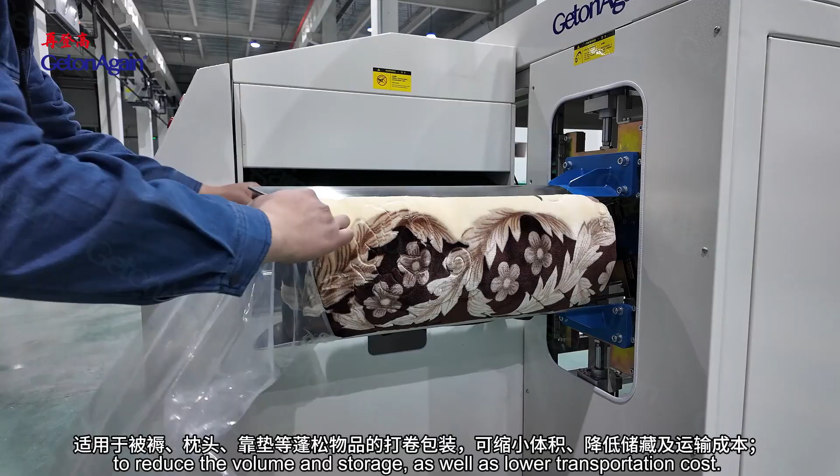The packing item is auto-fed from backward to forward by the belt during the compressing process, and rolled to pack into the bag.

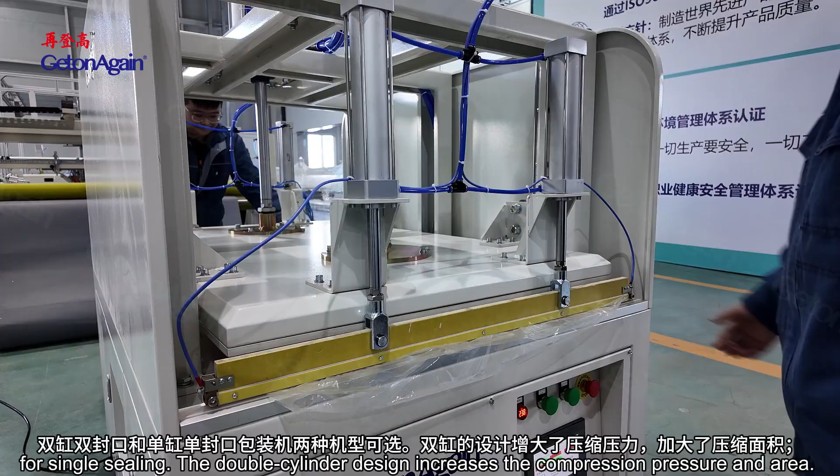Double cylinders for double operation, with optional models for double cylinders for double sealing, or single cylinder for single sealing. The double cylinder design increases the compression pressure and area. With the double seal design, two workers operate two products at the sides of the machine, greatly improving work efficiency, suitable for compressed packing of pillows, cushions, bedding, plush toys, and other products.

Needle detector applicable for large bulky products with ferromagnetic metal detection, for example bedding. Working width can be adjusted between 1,200 to 4,000 millimeters according to customer settings.

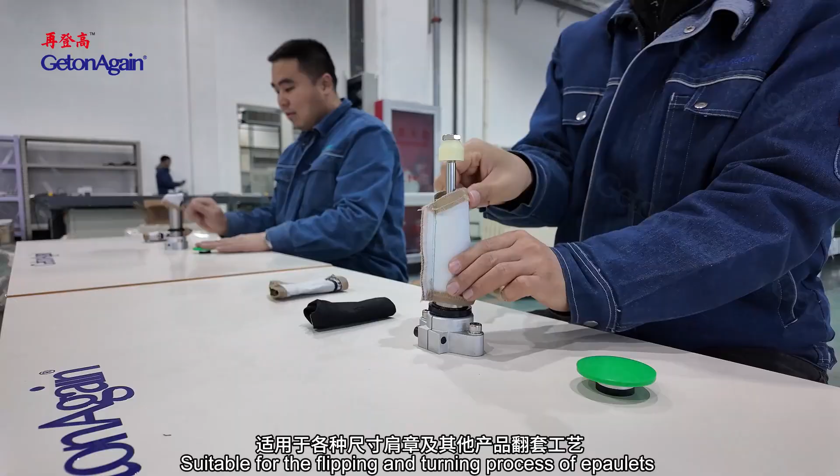Automatic flipping machine replaces manual operation with high efficiency, safety, and reliability, suitable for the flipping and turning process of epaulets or straps of various sizes and other products.

Automatic folding and packaging machine is economical, has a small floor space, simple operation, standard folding effects, and automatic transferring to the next station in the stacking mode, with two working modes, bagging and folding, adjustable. Both folding width and length are adjustable within a certain range. Suitable for T-shirts, polo shirts, hoodies, thermal wear, pants, and lightweight jackets, etc.

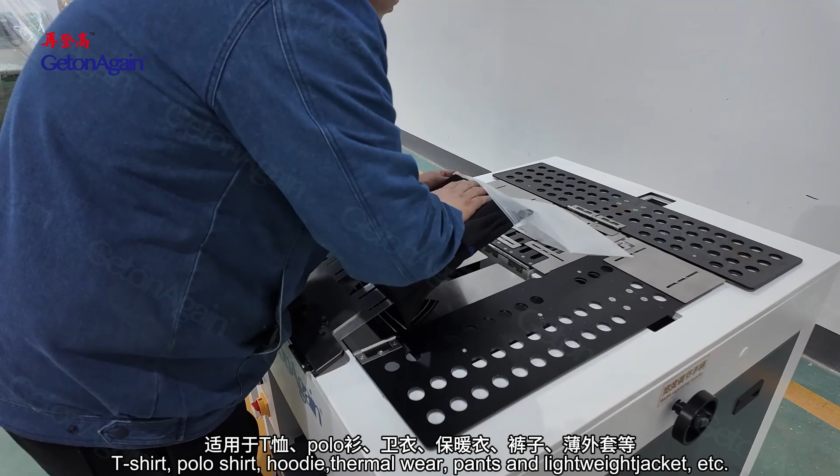Single and dual head cap pressing machine for baseball caps. Steam time, cap clamping time, steam output, and air consumption can all be automatically adjusted. A built-in steam generator eliminates the need for an external boiler, with automatic water supply, suitable for bulk order production needs.

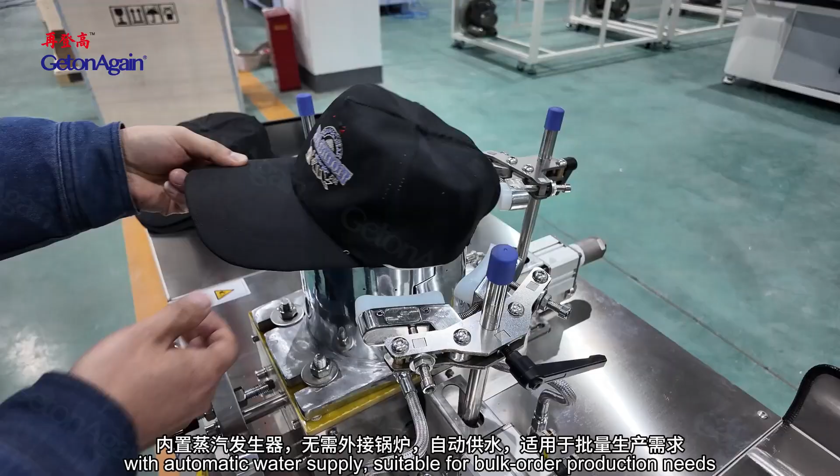Using a robotic arm, the machine can automatically grip the cap. Simply place the cap on the mold to complete the pressing process.

This is a compression bagging machine, automatically compressing with an air cylinder, side pushing the product for bag packing, greatly improving work efficiency. The bagging is even, with an electronic control program ensuring consistency of product.

The finished packed product is flat and nice looking, saving packing volume size. Compression stroke is adjustable to fulfill various sizes of packaging. Machine mold tools can be customized according to actual requirements. Suitable for compression bag packing of pillows, cushions, quilts, bedding, etc.

Garment CAD includes garment CAD, super nesting, template CAD, intelligent tufting CAD, wire stitching CAD, perforation, and embroidery CAD.

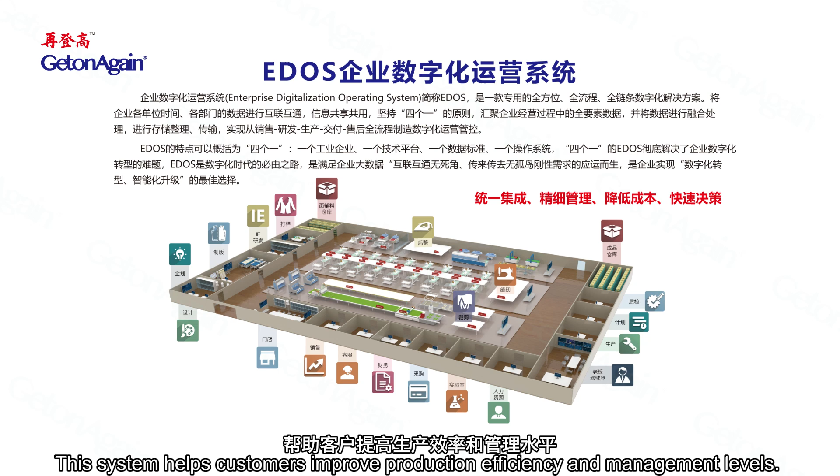In addition, GetonAgain has developed a digital operation and management system for industries such as garment processing and machinery manufacturing. This system helps customers improve production efficiency and management levels. Its features can be summarized as the 4 ones: 1 industrial enterprise, 1 technology platform, 1 data standard, and 1 operating system. It is the optimal choice for enterprises to achieve digital transformation and intelligent upgrading.

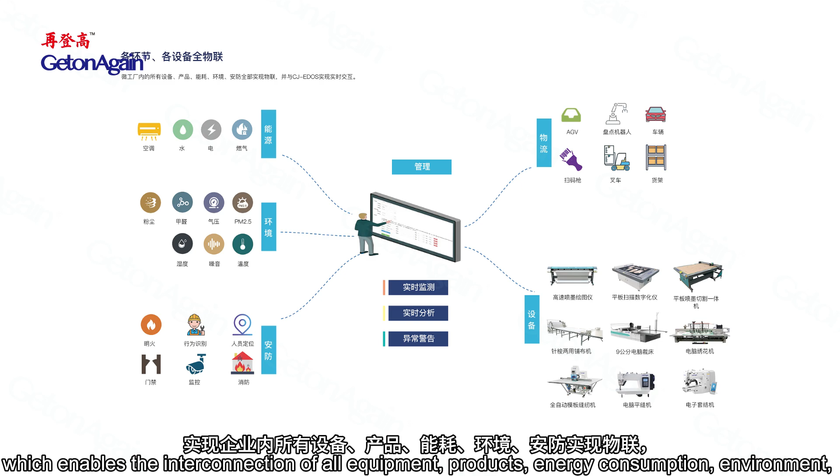Furthermore, by integrating Internet and IoT technologies, the company has developed an enterprise operating condition IoT management system, which enables the interconnection of all equipment, products, energy consumption, environment, and security within the enterprise. This system interacts seamlessly with the enterprise digital operation and management system, building a multifunctional integrated platform for enterprises. It enables functions such as data collection, real-time monitoring, data analysis, and remote management.